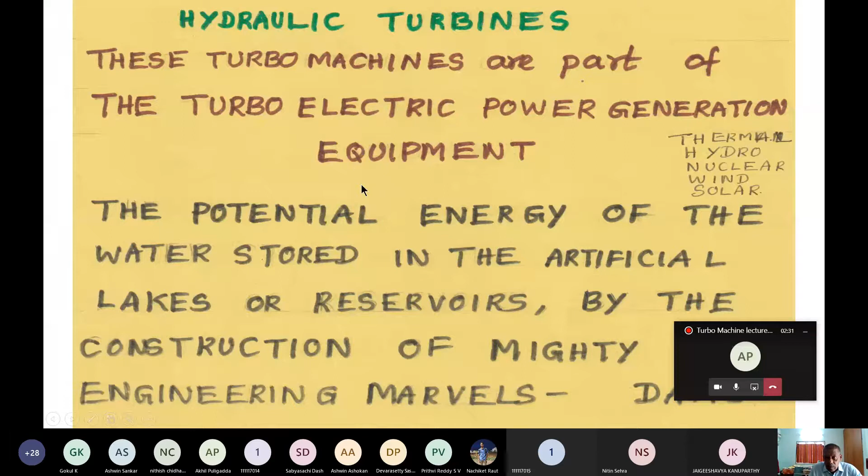Okay, the dams. These reservoirs have capacities up to 150 kilometer cube. So you see that the capacity of these dams can be expressed in kilometer cube. 1 kilometer cube means a cube of 1 kilometer side, that is 1 kilometer by 1 kilometer by 1 kilometer. Now you might know that if you calculate, in 1 kilometer cube you might be able to put all the human beings present in this world today.

In China, people talk about the Three Gorges of about 40 kilometer cube. Though many times it is wrongly presented that Three Gorges Dam is the biggest one and it causes a lot of problems, changes the speed of rotation of Earth and all those nonsense. I feel nothing could be true about that. In India, our maximum capacity is about 10 kilometer cube, maybe Bhakra Nangal or such places. And in Tamil Nadu, we have Mettur Dam, which is 3 kilometer cube.

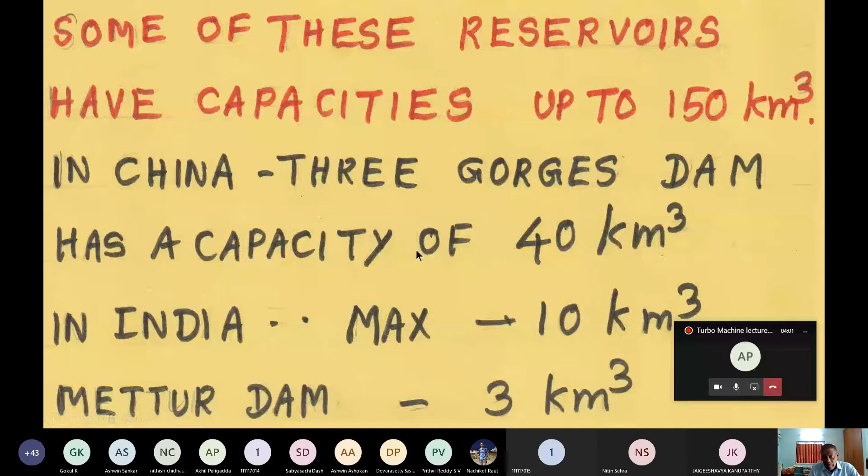Now about the heights of dams, I said that they are mighty marvels because you see such tall dams. In the world, the highest is nearing around 300 meters. To get an idea of what this 300 meters is, it is 1,000 feet, and one world monument is the Eiffel Tower, which is also around 1,000 feet. It is in Paris, and I think in Paris they don't construct buildings above this height, so the Eiffel Tower is a great mark there.

In India we have the Tehri Dam, maybe in Uttarakhand or some place like that. Then the Bhakra Nangal, that is also 226. The other one is 260. Then Narmada project, that is about 124 meters. They are all very tall in India.

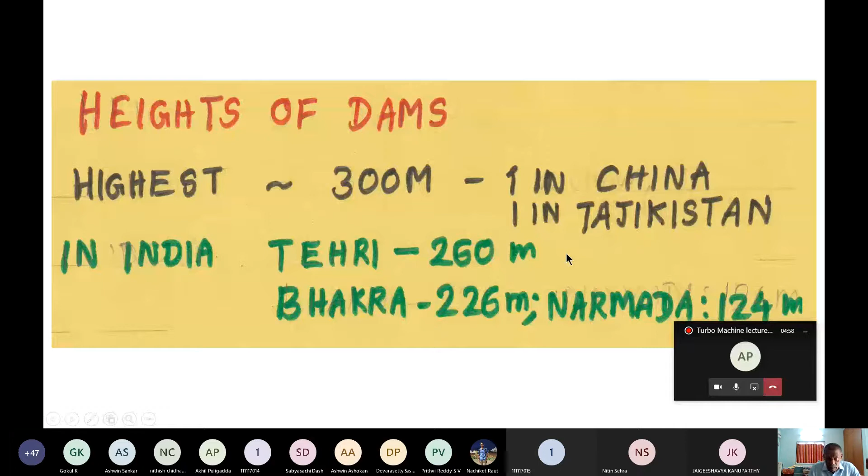Now the turbines, the turbo machines used for hydroelectric power generation. You have the common turbines like Pelton turbine, which is used for very high heads, 400 to 2000 meters. 2000 meters means 2 kilometers. You should remember that our hill stations like Ooty and Kodaikanal, their height is about 2 kilometers. And each kilometer you go up, the temperature drops by about 6.5 degrees centigrade, the lapse rate. These Pelton turbines are impulse turbines, and they may be called tangential flow turbines.

Turbines also have a non-dimensional number called the shape number, which is slightly modified to make the so-called specific speed. This is NST, T for turbine I have used. Specific speed for turbines, the expression is N root P by H power 5 by 4, where N is the RPM, P is the power in kilowatts, H in meters. These Pelton turbines, their range is about 10 to 50 of this specific speed unit.

About the specific speed, you should understand that for that particular value, for example 10 to 50, if you are designing a turbine, the Pelton type will give you maximum efficiency. How did they find out that? Through experience only. They have compiled all data about the machines, and they found that in this range 10 to 50, the type of turbine you have to use is Pelton turbine. In the world you have single units where the power could be even up to 450 megawatts.

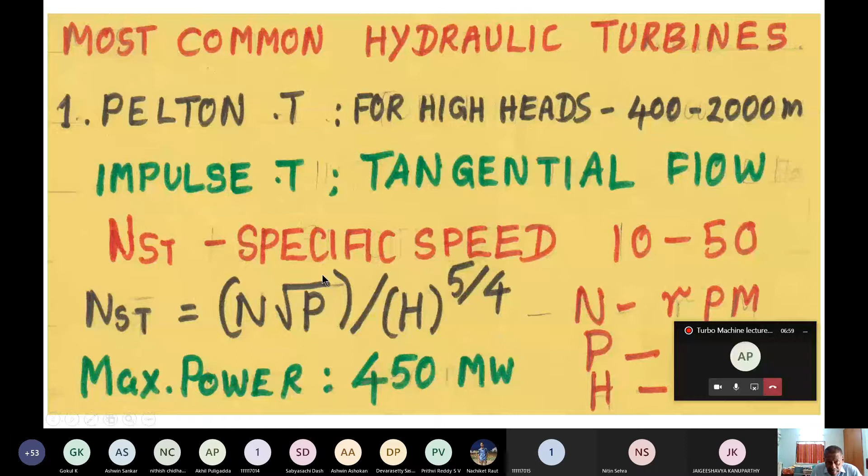Then you have the Francis turbine, which is used when the head is about 80 to 750 meters, mostly less than 400, but in some cases even above that they have used. I have given some very high upper limit. They are reaction turbines, radial or mixed flow. Specific speed range is from 50 to 350, and they are very powerful. Maximum power around 750 to 780 megawatts, so very large machines.

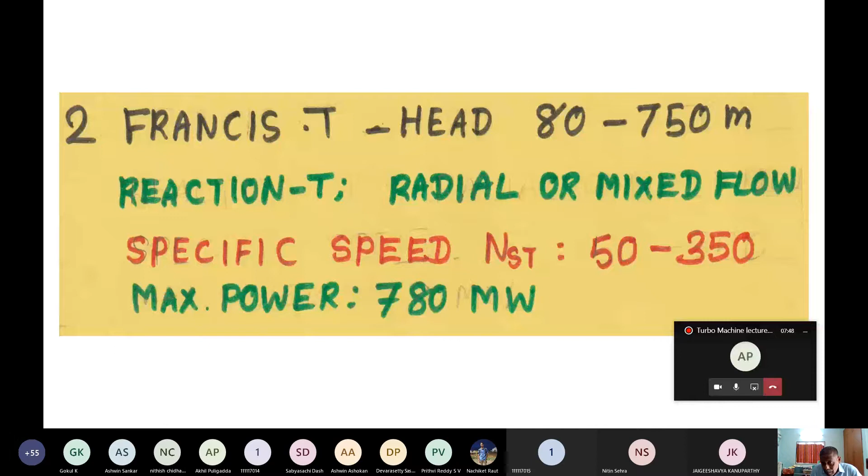You should remember that in steam turbines in thermal power plants, single units produce more than 1500 megawatts, 1600, 1700, they might be reaching around 2000 megawatts. That is the limit for a thermal power plant single unit turbine. Okay, there is another turbine called Deriaz turbine.

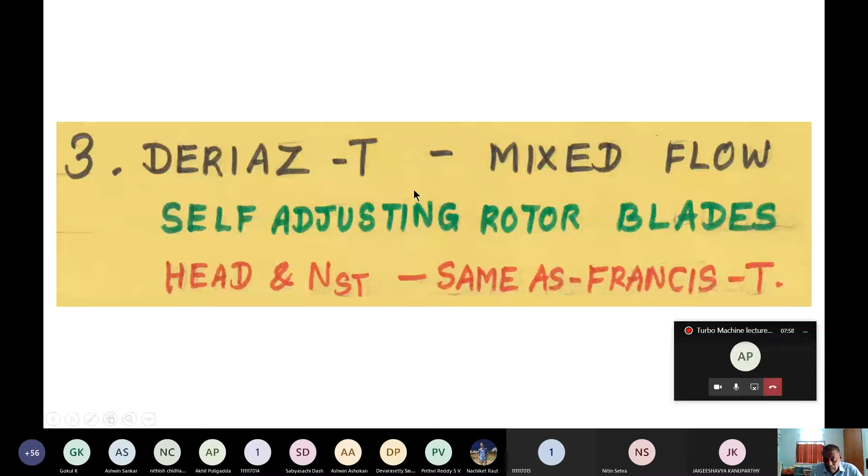Doesn't find much place in textbooks. It is mixed flow. It is also like Francis turbine, where the rotor blades are self-adjusting. About this, later we'll discuss what is this self-adjusting rotor blades, which is used in another very common turbine, the Kaplan turbine, Kaplan or propeller turbine, which is axial flow, which is used for low heads up to about 70 meters.

They come under the category of reaction turbines. Their specific speed is greater than 350. And in these turbines, the head is less. So again, large machines also produce only about 230 megawatt, the maximum power. So Kaplan also has self-adjusting rotor blades.

Propeller turbines are similar to Kaplan turbines. The rotor blades are fixed. You can't adjust it. So that has to do something with the efficiency when conditions vary. When the blades are adjusting, even at different off-design conditions, the efficiencies will be higher.

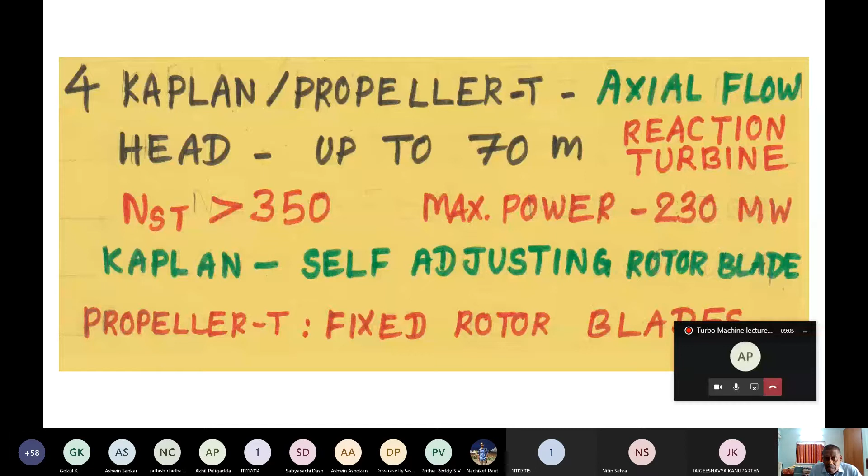Okay. Now, the basic layout of hydraulic turbines. So these turbines come connected to a dam. The dam is the construction. So a reservoir is created by the dam. Then at the bottom, you keep the turbine generator set, and whatever leaves from the turbine is connected to the tail race. It may be part of a river, so it is let off to the river.

The pipe that connects the water from the dam to the turbine, they are very large pipes. They are normally called penstocks, may be made out of steel or concrete. Okay, and think of a Pelton turbine unit where the height is say 2000 meters. Then what will be the pressure at the bottommost of the penstock pipe? Can someone tell me?

When in the Pelton turbine, you have a penstock, and if the total height of that is 2000 meters, 2 kilometers, what will be the pressure of the water at the bottommost point? Somebody? Are you able to hear me?

Sir, 2 megapascal. 2 megapascal. Or in terms of bar, how many bar? 20 bar. So 200 bar. 200 bar. Remember, bar is a standard unit, like 1 bar, 10 meters of water column. Okay, our automobile tires are around 2 bars. That is the unit used.

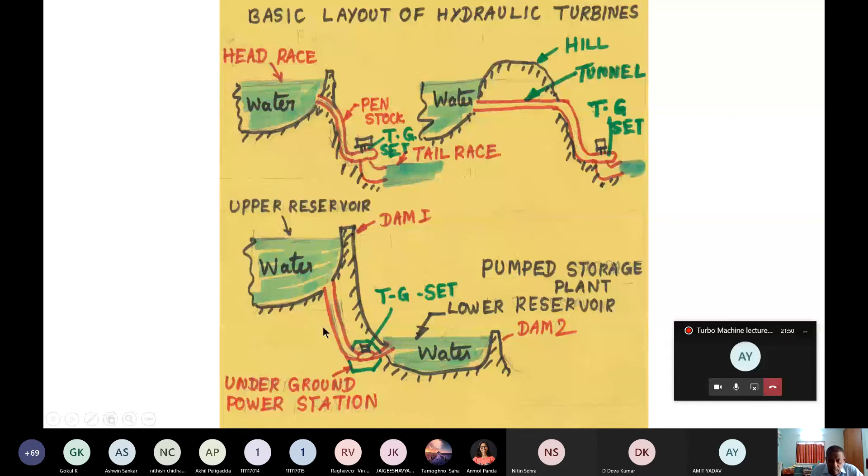Okay. Now something about the technical details. So when you talk about hydraulic power stations, about the head, you have to remember the two types of head. One is the gross head, the other one is the net head. The gross head is the level difference between the head race, the upper reservoir, and the tail race. So the turbine always is connected between the head race and the tail race.

Head race, you have the dam and the impounded water. Tail race, the water flowing down. Maybe the river is also there taking a course like that. Okay, that is the gross head. Then, because of certain flow restrictions, losses, the net head available at the entrance to the turbine will be less by the head losses. The basic equation, gross head is equal to net head plus head loss, or rather net head is equal to gross head minus head loss. So for turbine calculations, we will take the net head.

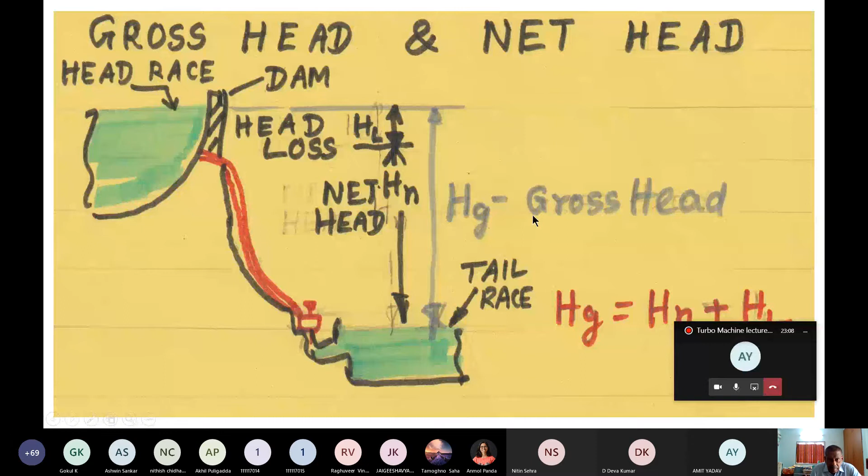Okay. Another interesting thing is something called runaway speed. See, when the load on the turbine is suddenly removed, some sort of tripping takes place. Suppose the generator is supplying load to so many places, and suddenly some tripping takes place. So generator load is removed from the turbine. So the turbine will start accelerating. If allowed for some time, it may accelerate up to a maximum speed, which is about double the design speed, which is called the runaway speed.

Okay, so maybe the turbine design takes care of this, but these days there could be a lot of other systems, like once the tripping takes place, the water flowing into the turbine can be controlled by closing the valve and things like that. So that is one direction. Now these runaway speeds for Pelton turbines are about 1.8 to 1.9 times the design speed. For Francis turbines, it is 2 to 2.2. Kaplan turbines, it is a little more, 2.5 to 3 times the design speed. Okay.

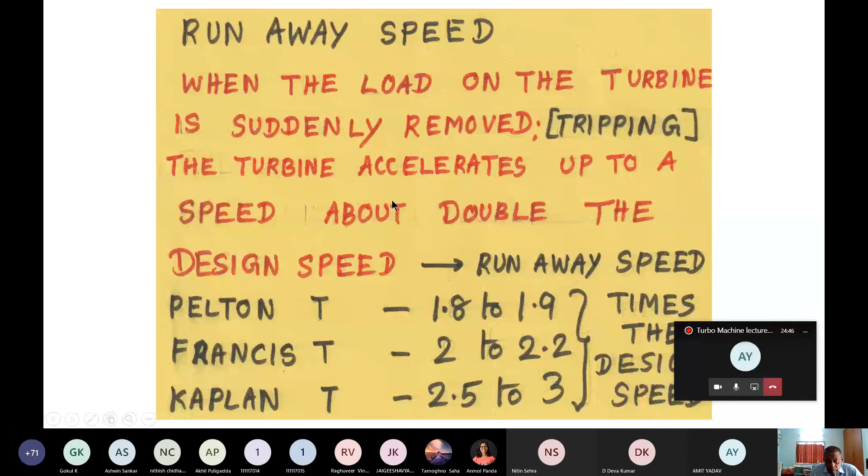Okay. Now we will take up the Pelton turbine. It's used for high head, so it's an impulse turbine. The basic arrangement is like this. You have a turbine runner where a number of buckets are mounted. Usually around 20 will be there, 20 buckets. And the flow is controlled by a spear valve. So with this spear valve, if the spear is moved backwards, more water will flow.

This type of spear valve arrangement is used because it produces the least loss in the arrangement of flow control. If it is conventional valves, it will produce a lot of loss. Here it's a very smooth flow, and it only restricts the flow. It doesn't create much loss. So the entire pressure head is converted to velocity head here, something like a velocity of √(2gH). It hits the buckets, and the runner starts running.

And traditionally they show a brake nozzle here. That is, maybe when suddenly it starts running very fast, you can use that and control the speed. Or when you want to stop it fast, even after closing the valves here, you can use a brake nozzle, which will send a jet of water in the opposite direction. There used to be another thing also by the side of the spear valve.

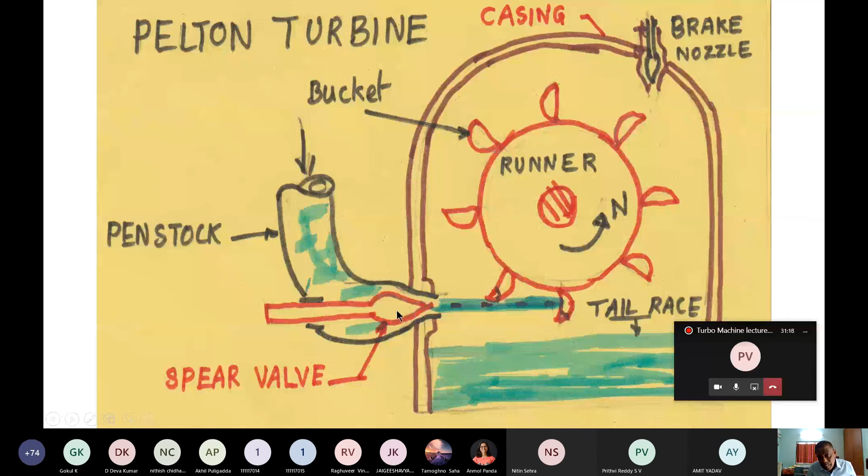Then in the middle there's a splitter, so that the jet is divided into two halves. It's a wonderful innovation. Probably Pelton's main contribution is this, to put a splitter here. If you send the water at one end and it comes out through the other end, you'll find that there will be some axial forces developing. When you split it into two halves, one half may produce some axial force that will be exactly balanced by the other half, so that there will not be any axial force.

Axial force means a force in the direction of the axis. In turbo machines you have three directions: the axial, the tangential, and the radial. The tangential is the main thing which contributes to the power transfer. Rate of change of tangential momentum flux, that is the one which produces the torque.

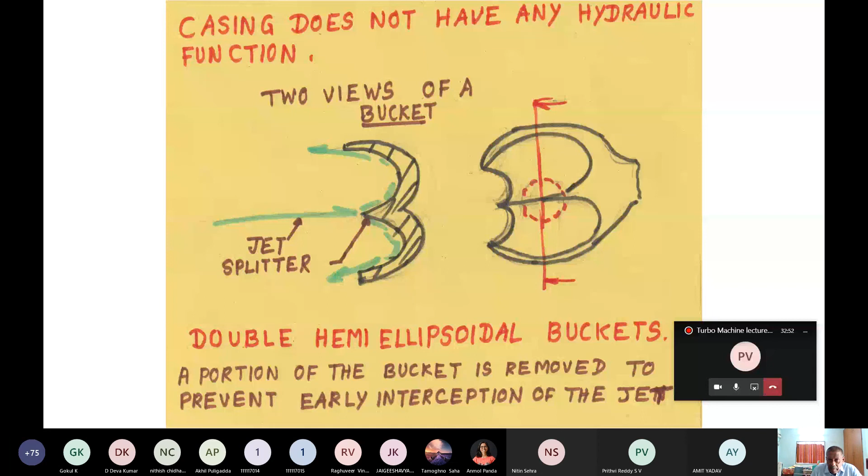Now slight variations in Pelton turbines. Instead of a single jet, you can have two jets. What is the advantage?

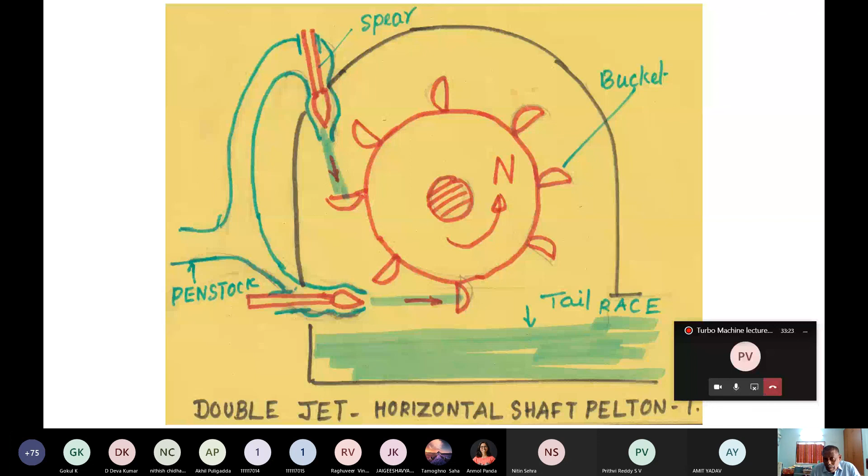So the penstock will have one passage resembling the centrifugal pump scroll case, the volute case. The area of cross section will go on decreasing in the volute-like arrangement. Initially the entire water will come. After sending some water through the first spear valve, you have less water, so the area of cross section is reduced. Like that it is subsequently reduced, and finally for the last one, the entire remaining water flows.

Any doubts in this? No, sir. Okay, so I think that is sufficient for today. We will get into the design and technical analysis for the Pelton turbine in the next class.